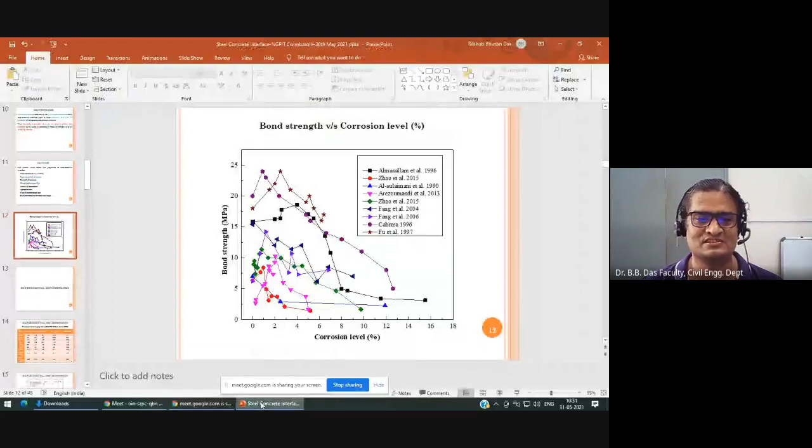Good morning. Shall we start, Shobna? Good morning. Good morning, ma'am, yes, we can start. Dr. Muthupriya, good morning, sir. Welcome. Shall we start, sir? Yes, you can start. Very good morning to one and all.

I hope you can see and I am proud and privileged to welcome all of you for this one week faculty development program on thrust areas of research in civil engineering, organized by the Department of Civil Engineering, Dr. NGP Institute of Technology, Coimbatore, in association with the Indian Concrete Institute, Coimbatore Center. I am happy to welcome our today's chief guest, B.B. Das, Professor of Civil Engineering, National Institute of Technology Karnataka, Surathkal, for this FDP.

Thank you for accepting our invitation, sir. Thank you, Dr. Muthupriya. I am happy to welcome all the participants who have joined through Google Meet, and also many who are unable to join as the meeting is full. So the YouTube link has been shared, you can watch it through YouTube.

I would like to thank our management, principal, and other authorities for permitting us to conduct this one week FDP on thrust areas of research in civil engineering. I am thankful to all the resource persons who accepted our invitation to deliver sessions on these thrust areas, and I thank all the participants for their interest in attending this faculty development program.

I also welcome the chief guest again and the participants for this one week faculty development program. I would like to invite the coordinator, Ms. Shobna, to deliver the address on the chief guest's profile. Thank you.

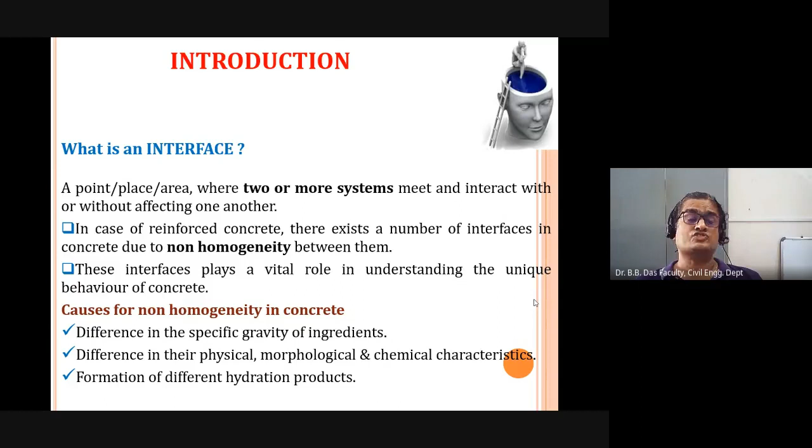That is the one giving me less pores in the concrete, so everything - but it is not the case. When I add water to the cement, I get different varieties of hydration products: calcium silicate hydrate, calcium hydroxide, the monosulfates, the ettringites. There are many such hydration products being formed depending on the type of ingredients and the source of materials. So that is also one of the prime reasons for the non-homogeneity in concrete. Remember, that is what you should understand.

So when I talk about the steel concrete interface, that is what we discussed about the non-homogeneity in concrete. But let us move into the steel concrete interface now. What is the non-homogeneity? Well, steel is very high in specific gravity, a very dense material, as compared to the specific gravity of concrete. That's the major reason. There is bound to happen a non-homogeneity, and due to that, there must be formation of an interfacial transition zone between them. That is natural - you cannot avoid it. It is an impossible job.

So when we talk about the steel concrete interface, that is SCI, it mainly consists of two parts: one is the steel part of the steel concrete interface, and another is the concrete part of the steel concrete interface. Now come to this picture. Here is my steel concrete interface - left side is my reinforcing steel, and right side is my concrete. This dotted line divides the steel part and the concrete part of the steel concrete interface. Now let us go one by one.

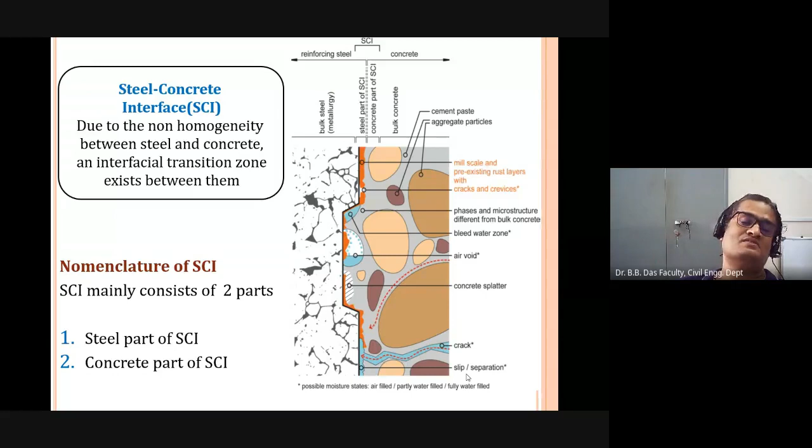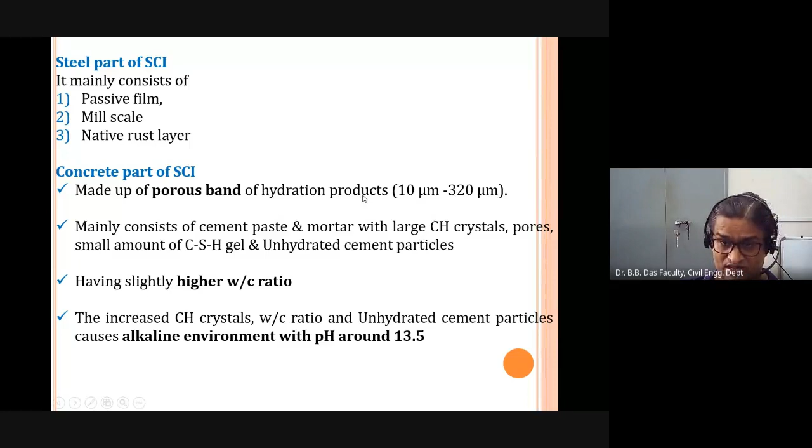So, as I talked about, the steel part of SCI mainly consists of passive film, mill scale, and native rust layer - all characteristics related to the steel's metallurgical properties. Now, the concrete part of SCI is made up of a porous band of hydration products, mainly consisting of cement paste, mortar with large calcium hydroxide crystals, pores, a small amount of CSH gel, and unhydrated cement particles, having a slightly higher water cement ratio. The increased CH crystals - calcium hydroxide - water cement ratio, and unhydrated cement particles cause an alkaline environment with pH around 13.5.

These are the information that we have collected from the literature, and we have also checked and verified it in our lab. Yes, whatever the reported literature says is absolutely okay - we are getting the same thing. So that is my concrete part of the steel concrete interface.

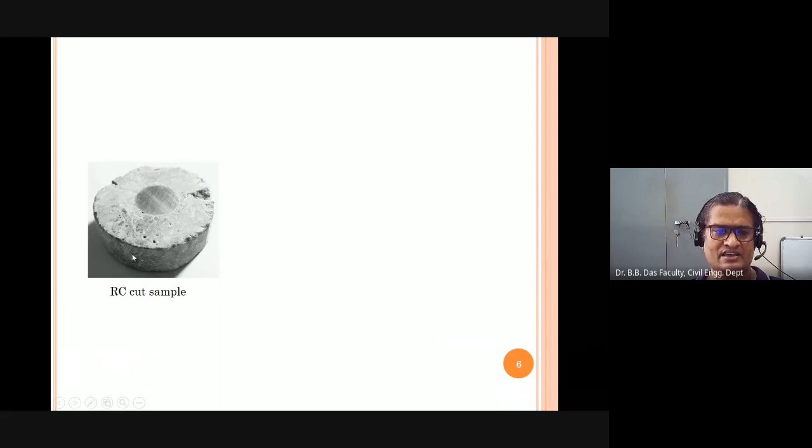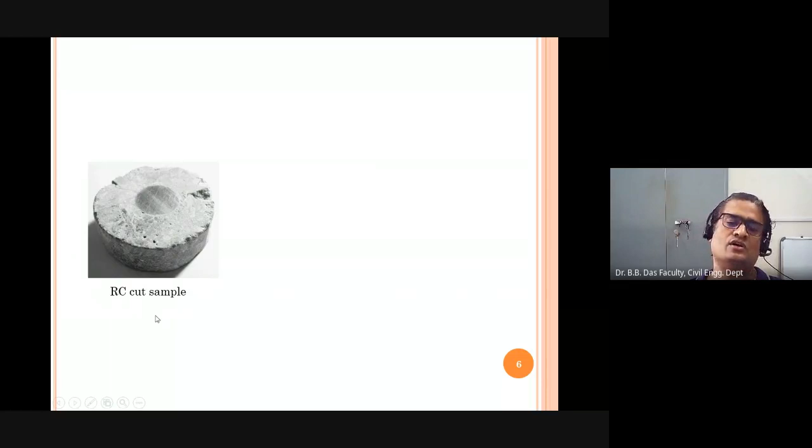So now you can see, you must have seen this kind of pictures. What is this kind of picture? Well, the complete dark area is steel, surrounded by reinforced concrete. So this is a core being taken from a concrete beam. This is called a reinforced concrete cut sample. You must have seen it actually.

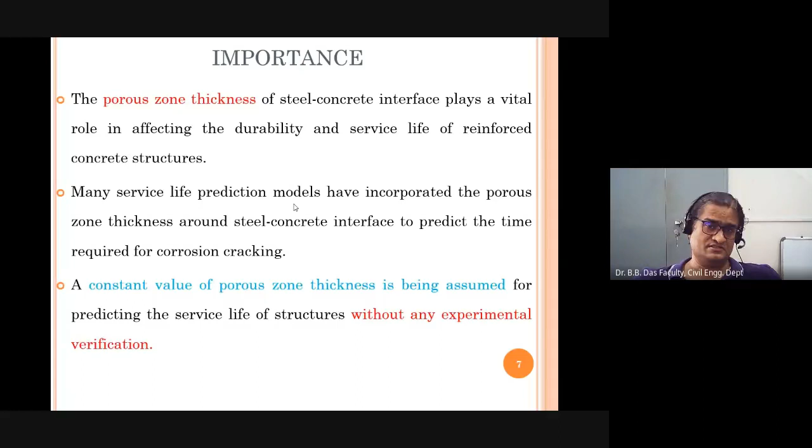Now, many service life prediction models, there are many models, if you go into literature, well, there are many such prediction models with the help of which you can determine the remaining service life for reinforced concrete. What we observed actually is that many service life prediction models have incorporated the porous zone thickness around the steel-concrete interface to predict the time required for corrosion cracking.

Remember, service life prediction models are nothing but the determination of when, because of corrosion, the concrete is going to crack. If you can determine at what time the concrete is going to crack, well, remember in an RCC reinforced concrete structure, if your concrete is cracked, that is the point where your service life is almost getting lost.

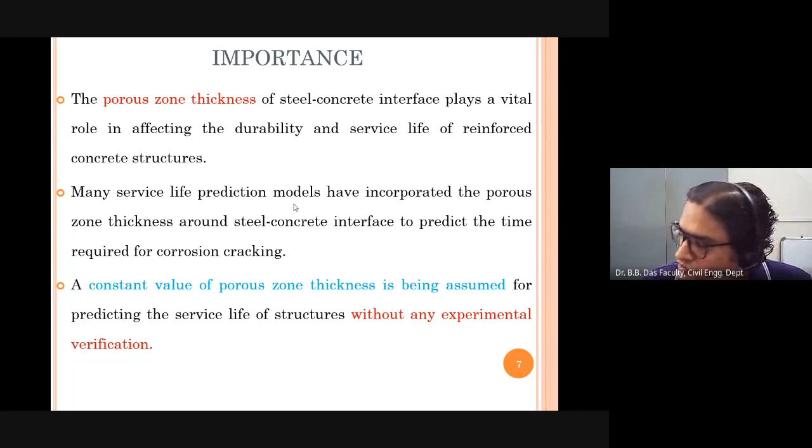Meaning, once the concrete is cracked, it is going to fall in a patch, and the reinforcement steel is going to be exposed, and corrosion will start, and that is the way you can say the bridge or the structure, the building, is at risk. That is the point where we need to evacuate people from buildings, or stop the movement of traffic on bridges. So whatever the case, you have to take measures. So that is actually my service life prediction models.

Now what is happening right now, till now what is happening actually, what was happening before our research.

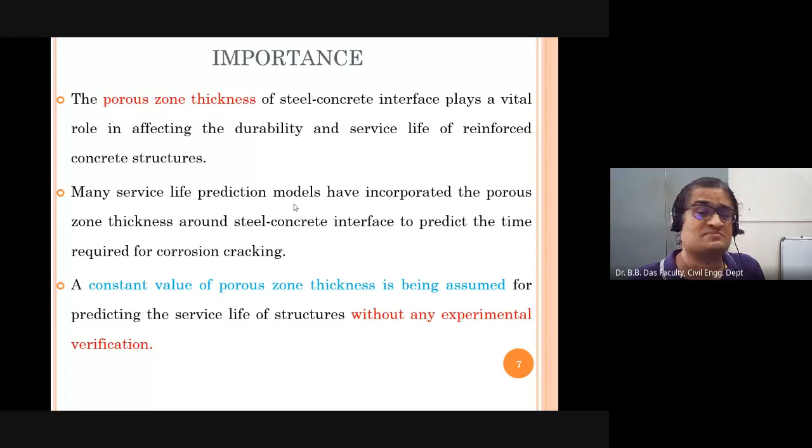A constant value of porous zone thickness is being assumed for predicting the service life of structures without any experimental verification. All the prediction models available, we checked everywhere, they are saying assume a constant value of porous zone thickness.

So imagine you have a concrete and steel. Now the sample I shown you, this is my sample. I will assume the ring - there is a ring of this kind of porous band. That is what I am calling my porous thickness, this thickness, let us assume it.

Well, in civil engineering design, many things we assume, isn't it? You must have assumed when you design for a beam, reinforced concrete beam. There are many assumptions in a design, and this is also how all the researchers have been assuming.

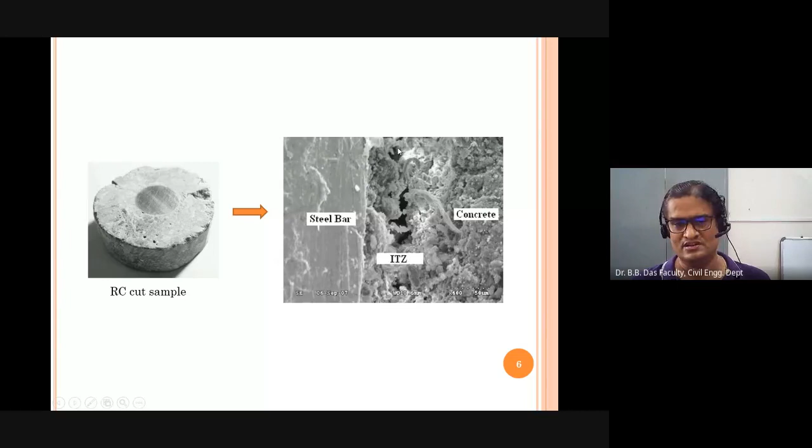They were assuming yes, there is a ring, there is a constant thickness ring available within the steel and concrete. But do you think, after seeing the picture, that the pores available everywhere have the same thickness? Everywhere, are you finding the same thickness? No, it is not the case actually. It is not the case.

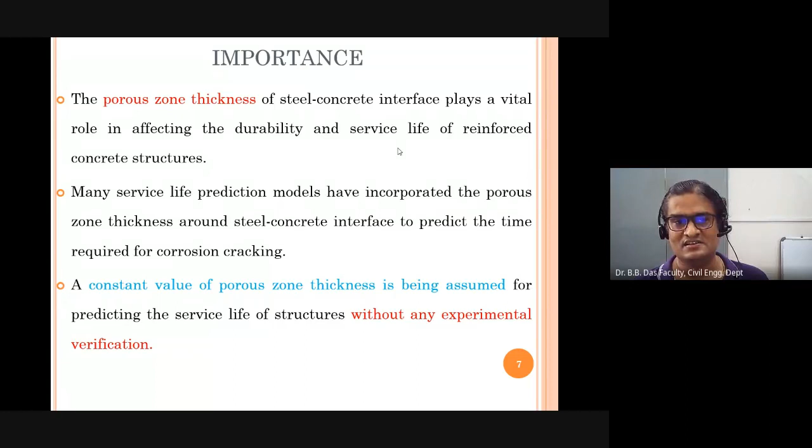So that is found to be a big flaw in the service life prediction models. That is the way we thought we will work on determining what is happening when we go with measurement of the porous zone thickness.

Now come to this, okay, service life model. I was just talking about when the concrete is going to crack. Now let us assume the x-axis represents the functional service life of the structure, and the y-axis represents the pressure caused by the corrosion.

When I talk about the beginning of the functional service life, how does it happen actually, what is the mechanism? The moment you build the reinforced concrete structure, the first thing is it is going to have an exposure against harmful ions such as carbon dioxide or chloride. Let us assume for some time, the initiation period, the penetration of carbon dioxide and chloride is going to take place, or you can say the movement of moisture may take place.

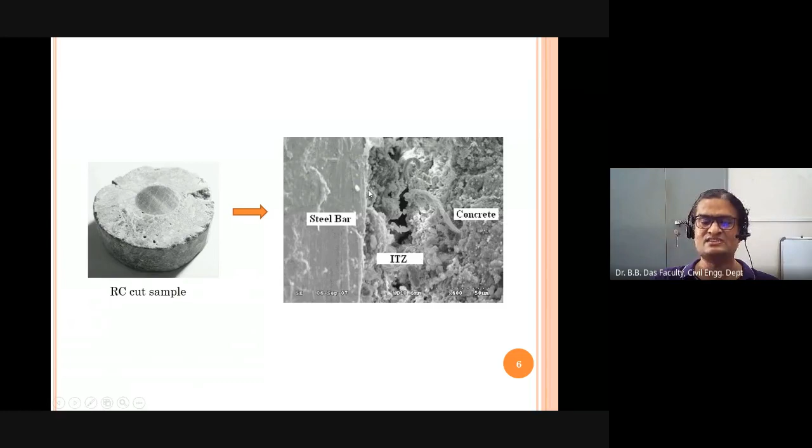Remember, rust has a very low specific gravity. The steel has a density of 7.85, but the rust has a density of one-third that of the steel. So what will it do? It needs more space to occupy, so it will occupy more space.

Where will it happen? Well, in the initial stage it will keep on filling these pores. So that is showing the expansion time, or the free expansion time. So I will call this my expansion time, the free stage. This means till now not much stress is being pushed to the concrete from the steel.

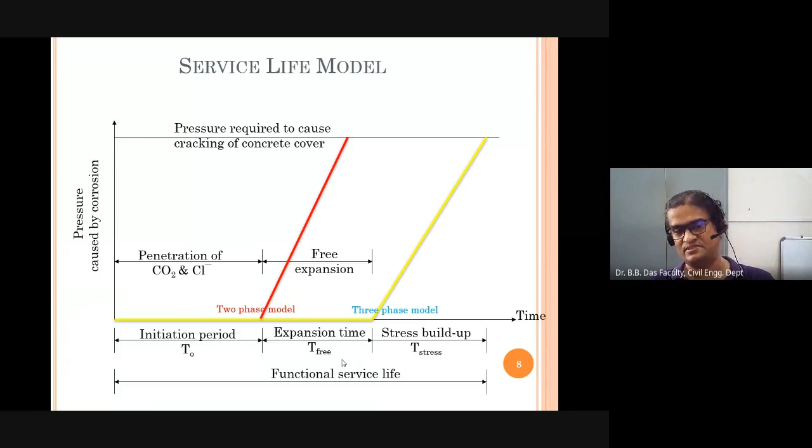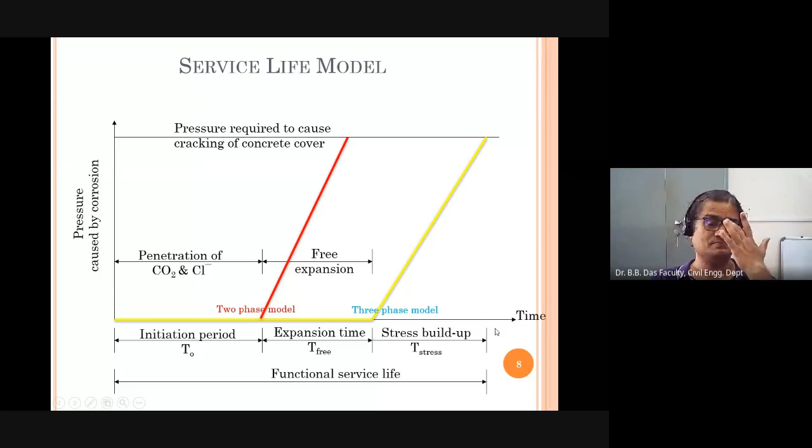The last stage is my stress buildup. Stress buildup is basically the moment all the space between the steel and concrete gets filled up. Now, as corrosion keeps on happening, you get more and more rust. But where? There is no space left to occupy, because all the space between steel and concrete is being filled up. So that is the point where stress is going to build up within the concrete.

So the steel is going to push radially into the concrete to go out, because it needs more space. I am getting corroded, and my rust products need more space. That's why it is called the stress buildup, stress buildup within the concrete.

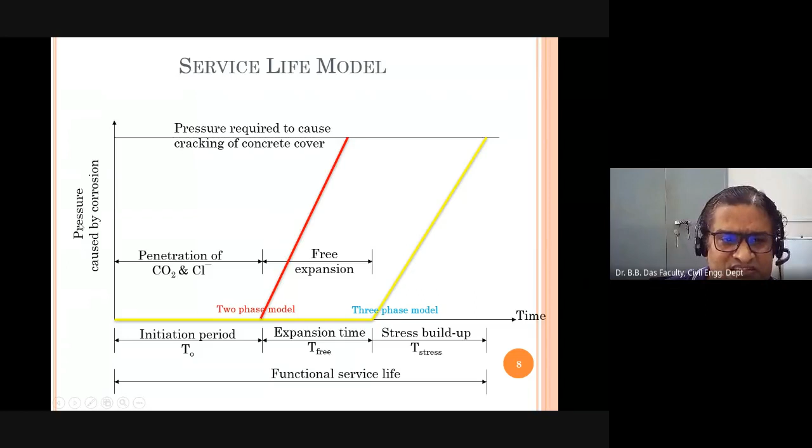Remember, now what will happen? The stress will keep building up. At this point, that is the pressure caused by corrosion. This is the point where the tensile strength of concrete becomes less than the pressure caused by the corrosion, and that is the point where the concrete is going to crack, because the concrete is being pushed radially by the steel. It develops a stress, and if that stress overcomes the tensile strength of the concrete, that is the point where I'm going to get a crack on the concrete surface.

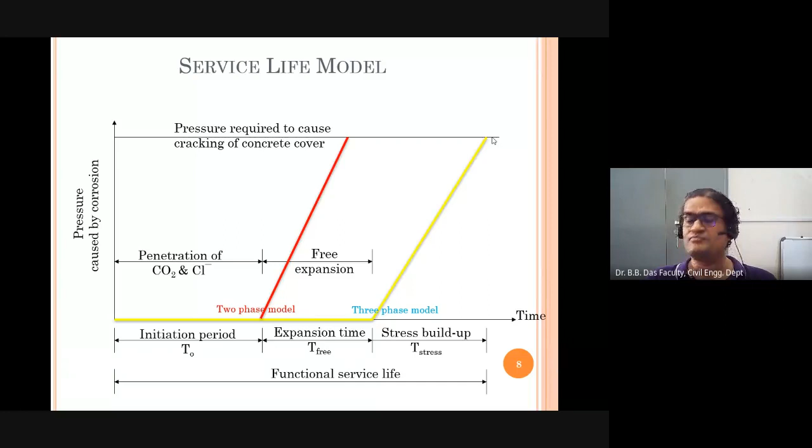So that is the point I will call the pressure required to cause cracking of the concrete cover. Okay, so there is a pictorial representation, we will go into it.

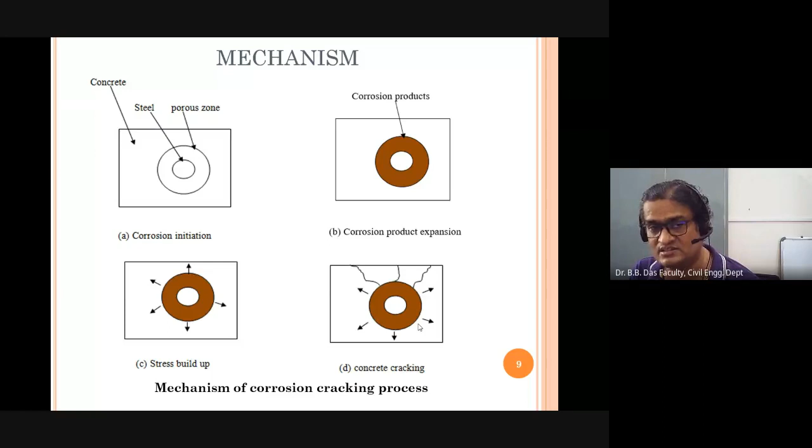I have experienced many such problems in bridges. So many times you will suddenly see a patch of concrete going to fall from the bridge while a vehicle is passing, and imagine a patch of concrete falling on your vehicle while you are traveling around 120 kilometers per hour. What is going to happen? So this is a serious concern in cold countries like the United States and other cold countries.

So definitely there was an important research gap not being addressed at that time. So what is the significance? A small variation in considering the porous zone thickness around the steel-concrete interface leads to huge variation in service life prediction of concrete structures in marine environment.

I will tell you, you will get to know. Don't think about what is the thickness of the porous zone - remember, this is just at the micron level. So the size of the porous zone is only in micrometers, that is 10 to the power minus 6 meters.

So even though it is in micrometers, if your assumption is slightly deviating, or if there is a small variation in the micrometer range, you will get a completely different result, a complete variation in the service life or remaining service life for the structure. So imagine how dangerous it is.

This is the point I experienced when I came back to India and applied these models in many of the bridges in Mumbai city, because Bombay is just on the coast with a highly corrosive environment.

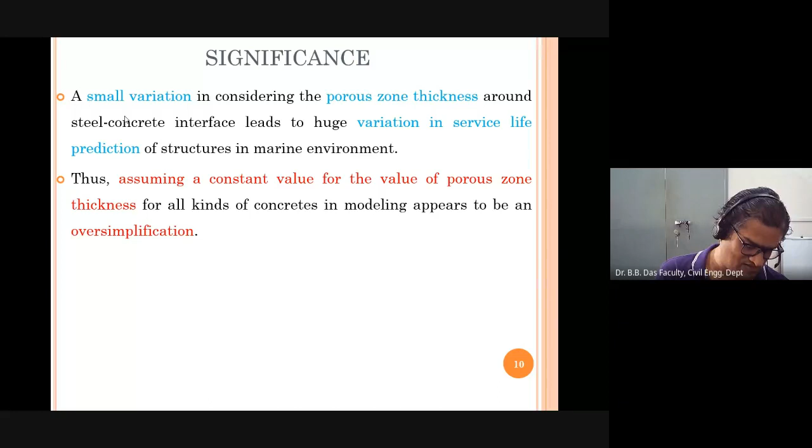That is the problem. So the challenge is thus: assuming a constant value for the porous zone thickness for all kinds of concrete in modeling appears to be an oversimplification.

This is the point where I realized, introducing different cements - we have in the market ordinary Portland cement, Portland pozzolana cement, Portland slag cement. Right now we have three types of cements available in the market. Plentifully available is the PPC, that is Portland pozzolana cement, followed by the PSC, Portland slag cement.

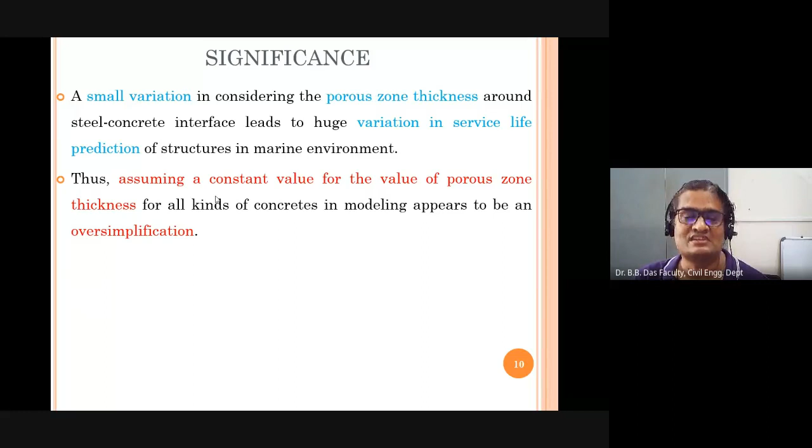So when we are using different kinds of ingredients or different kinds of cements, shall we use the same value for all the models, for all types of concrete? That was also a big question mark. So it is an oversimplification - let us not be overconfident. Let us measure and see what is happening when I am going with the different types of cements.

If you go into the different literatures, a lot of work has been done on this. People have talked about the different factors affecting the steel concrete interface properties, such as water cement ratio, type and quality of cement, strength of concrete, mineral admixtures, amount of compaction, aggregate size, type of reinforcement bar, diameter and shape. So there are many such factors affecting the properties of the steel concrete interface.

I remember one of my scholars went to a conference, TMSF 2019, and was delivering a review work on this slide, about how different factors influence the properties of the steel concrete interface. Some of you might have heard about it.

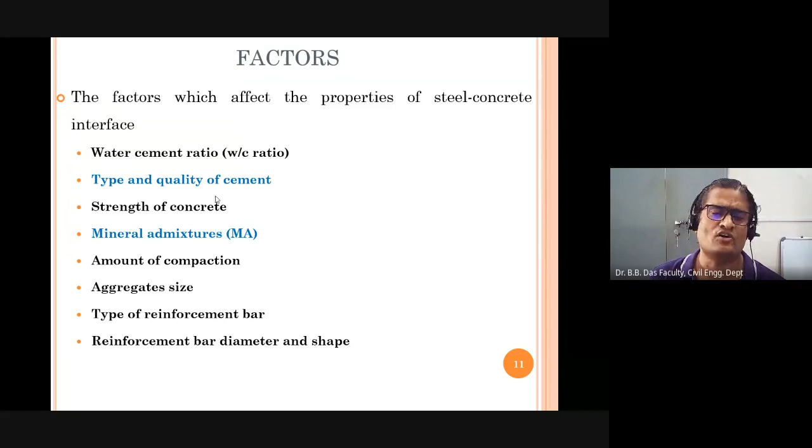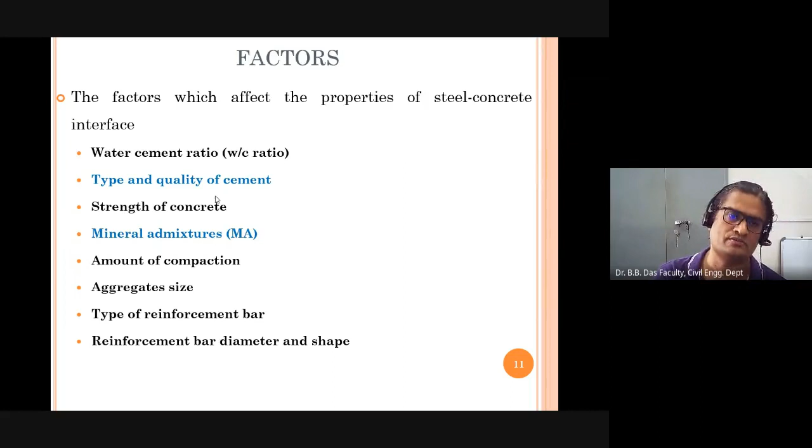So in today's presentation, I will talk about the type and quality of cement, or you can say the mineral admixtures, when I talk about fly ash and silica fume. So we will talk about cements. Well, one more thing I want to show you, this picture.

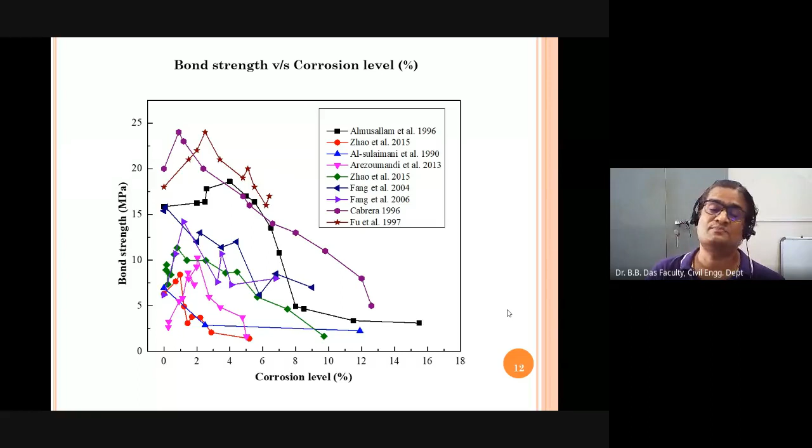You can see here, for one researcher, at 1 or 2% corrosion the bond strength increases from about 20 to almost 25, but as the corrosion percentage increases, it drastically comes down. By around 10-12% corrosion, the bond strength becomes very low. So that proves the mechanism of the corrosion cracking process.

So let us move into the experimental methodology. This is a very important theme of the research. If you have any doubt, please ask me, and I will explain again.

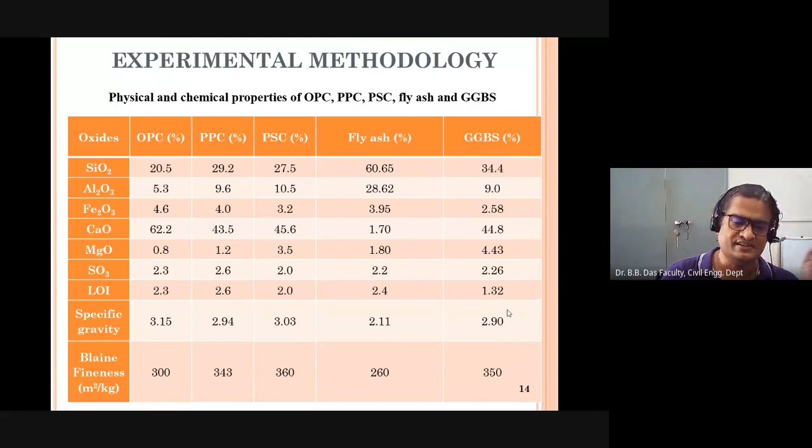So what we did: we collected materials like OPC, PPC, PSC, fly ash, GGBS, all from the market, and determined their oxide compositions, specific gravity, and fineness, all of which are available. This also includes the particle size distribution analysis for coarse aggregate, fine aggregate, fly ash, and GGBS.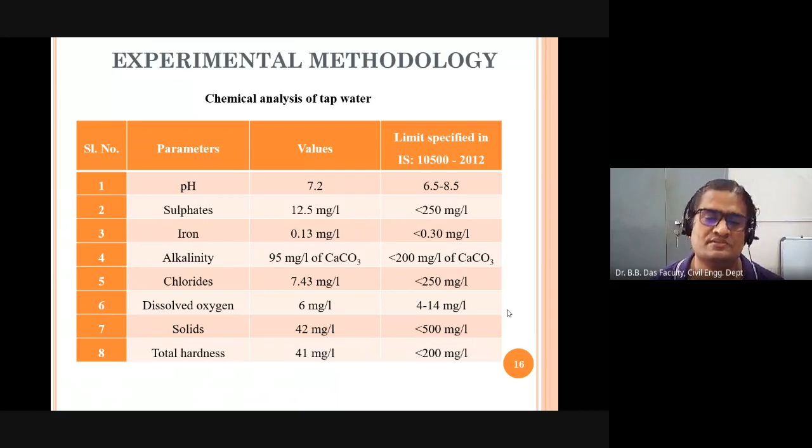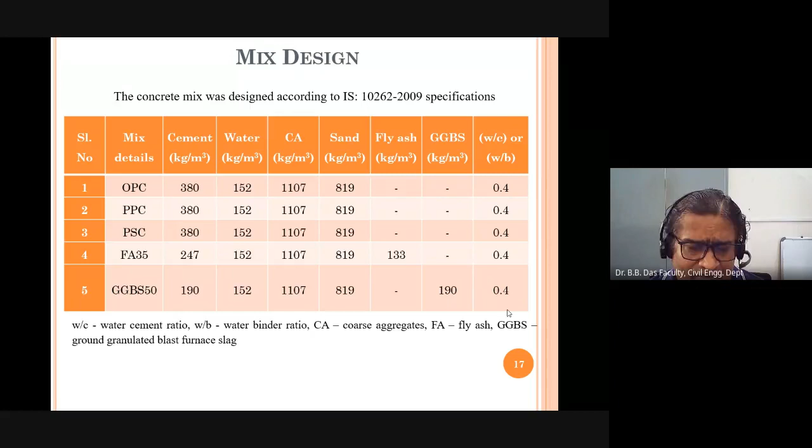Then we did a chemical analysis of the tap water too, checking it should not have any chlorides or sulfates since we were using tap water, ensuring it is within IS limits. And this is the simple mix design, done for M40 grade concrete, where we kept the cement content fixed at 380 kg per meter cube, then replaced it partly with fly ash and GGBS.

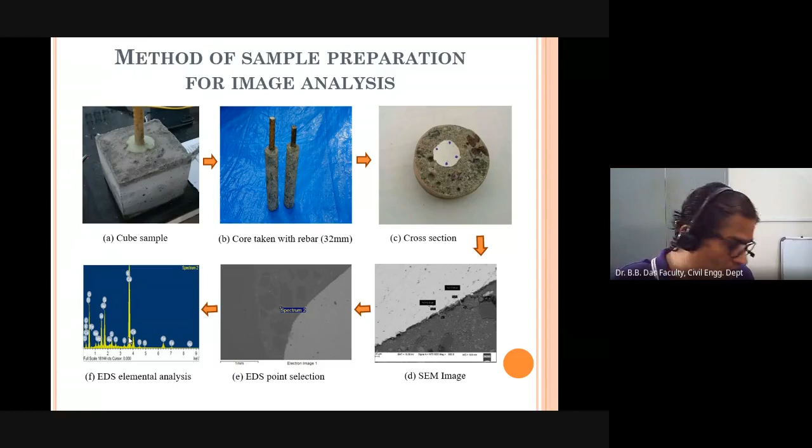I will show you, this is my final energy dispersive spectroscopy elemental analysis, which will give me a mapping of calcium to silica ratio. For a cementitious material, the most prominent ratio of elements is the calcium by silica ratio, you must be knowing about it. Last lecture also I spoke about how calcium by silica ratio plays a vital role in understanding the hydration mechanism.

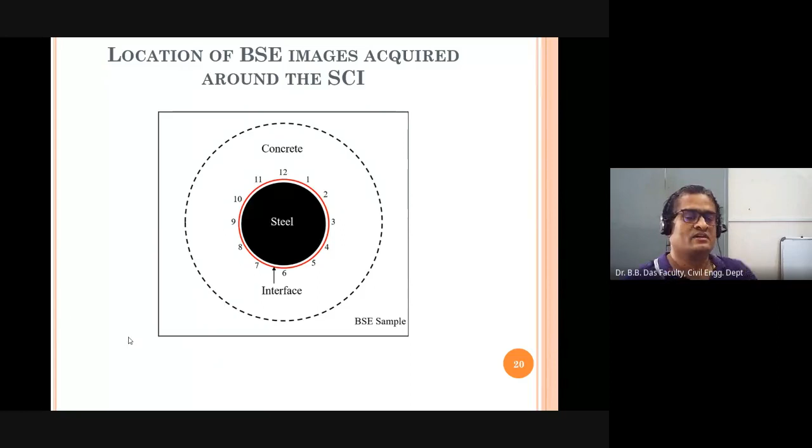So you can see here, for backscattered electron images in SEM, we have taken around 12 images all across the steel concrete interface. So this is my steel and this is my concrete. I have taken images at frequent, uniform intervals—1, 2, 3, 4, 5, 6, 7, 8, 9, 10—12 points I've chosen for taking the backscattered electron images.

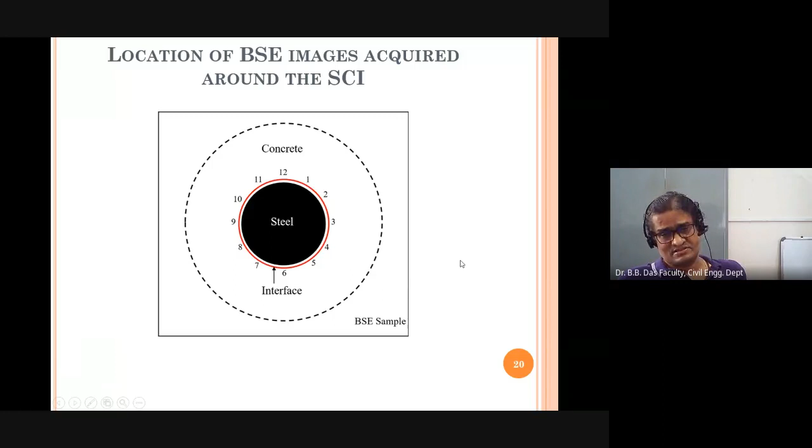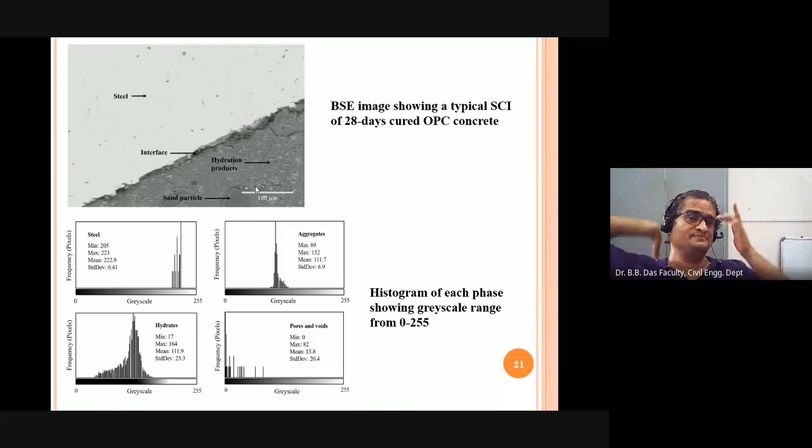So now what is important for me? The important thing is we have to go with the grayscale analysis. Grayscale analysis is an image processing analysis which can determine the pore quantification, the quantification of pores.

So when I do the grayscale analysis for steel, I am getting a mean value of 222.9. For pure aggregates, the grayscale analysis mean is giving around 111.7. When I go with the hydrates, the mean I'm getting is 111.9. Now when I go with the pores and voids grayscale analysis, I'm getting a mean of 13.8. So that is the idea this picture gives me.

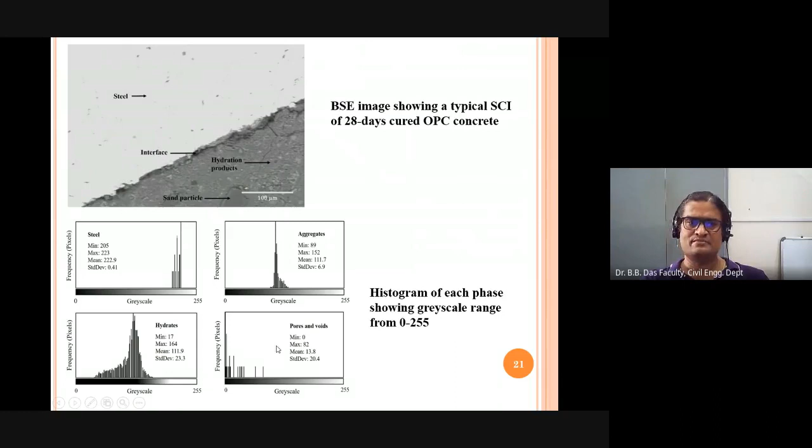So this is my interface. Now, in this picture, can I separate the pores and voids from other materials? Well, exactly—what I did was, we did some programming, some image analysis programming, and through that we did some BSE, that is backscattered electron image, thresholding.

So we realized, with a gray value of 42 and below—because the highest for the pore was 82—so we considered around 40 as the threshold. Below 42 is my pores, more than 42 is my other materials, that is maybe steel, maybe concrete, maybe the aggregates or other materials or hydration products.

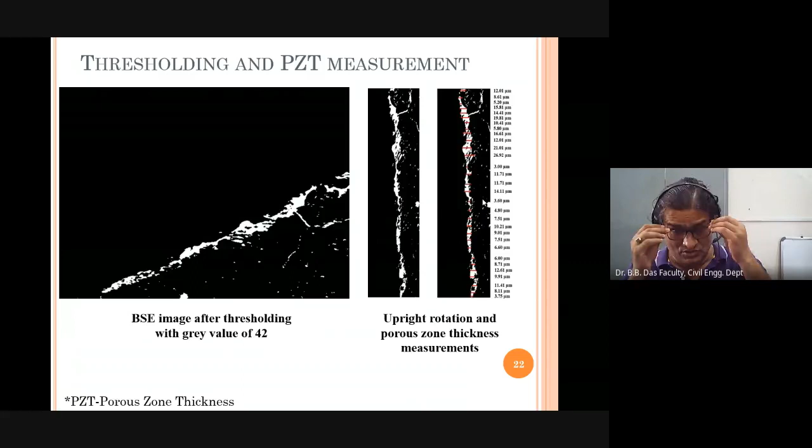So now how are we going to present it? Statistically speaking, if you see the statistics, statistics says you have to measure a minimum of 30 points. Your measurement has to be there, and you have to take the average of all the measurements. Then you can report for that particular sample: yes, this is my average porous zone thickness.

So that is the way. The porous zone thickness measurement is over, and then we will see next the results. Now, again, the point is the energy dispersive spectroscopy locations around the steel concrete interface.

Now how are you going to do it? That is also important, because EDS is going to define the hydration phenomena. So what we did - you can see here, the red one, assume it is just on the steel concrete interface - and from the steel I know there is no point in going towards steel, because steel we know is very much uniform. So from steel we have gone a 20 micrometer distance.

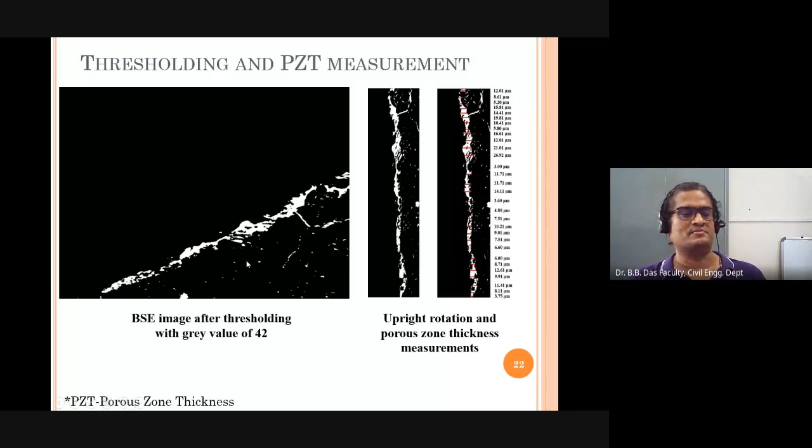So from this point 20 micrometer, this point 20 micrometer, this point 20 micrometer, to check what is happening in the hydration mechanisms. This picture shows it: somewhere one point is on the ITZ, and then 20 micrometer, again 20 micrometer, again 20 micrometer, because we know this concrete is only non-uniform or non-homogeneous.

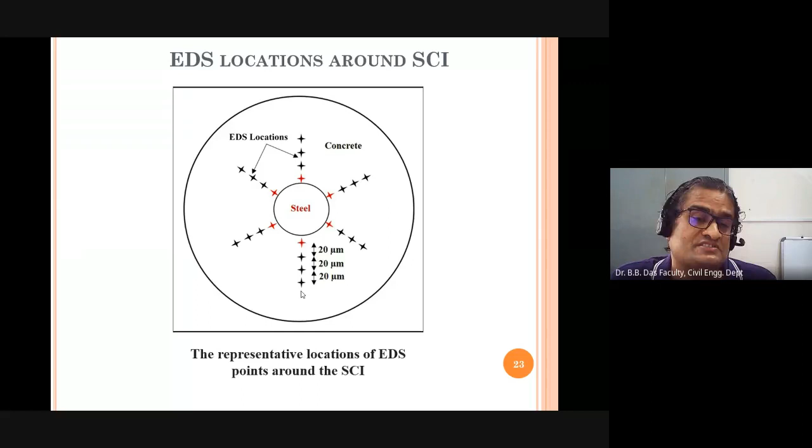So there is a need to check what is happening from the ITZ towards concrete, because steel we know is very much uniform - we don't need to understand that, a civil engineer doesn't need to measure anything there. It's a metallurgical point of view where something can be done, but from a civil engineer's point of view, nothing can be done, so better to measure this side. That is how we measured from steel at 20 micrometer distances - that is the point where the energy dispersive spectroscopic points were decided.

So here you can see exactly - this is my steel. The first spectrum for the concrete is taken just on the ITZ, that is the interfacial transition zone, and this is spectrum one for the SCI. Spectrum one is at 0 micrometer, that's what I was talking about, and spectrum 2 is 20 micrometer away from the steel surface.

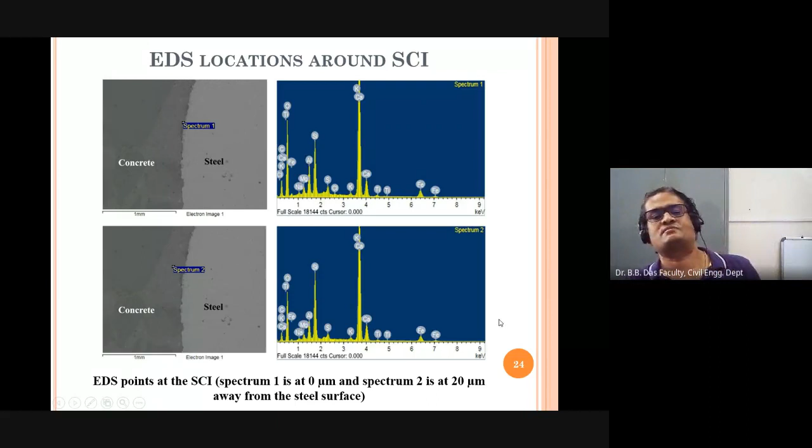So just as I was telling you, it is taken at 20 micrometer intervals. So spectrum 2 is 20 micrometer from the steel concrete interface, and this is my spectrum 2. Now let us go into the results and discussions.

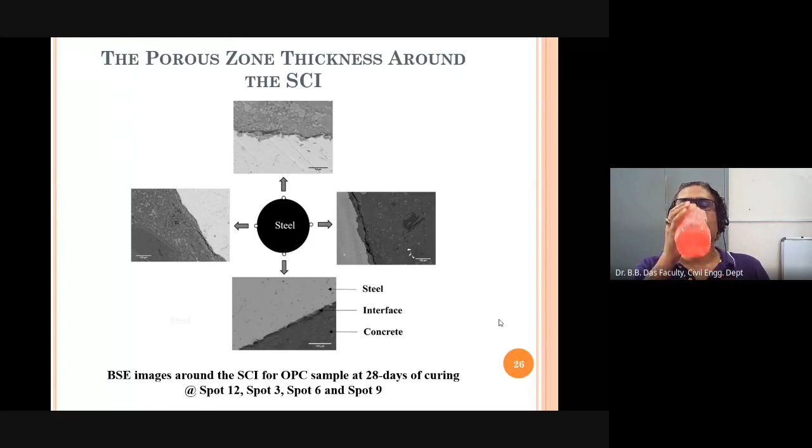So backscattered electron images around the steel interface for OPC sample, 28 days of curing. Spot 12, spot 3, 6, and 9 means these are my 12 spots. You must have remembered I counted 1, 2, 3, 4, 5, 6, 7, 8, 9, 10, 11, 12 like that. So 12. This is my 3, this is my 6, and this is my 9.

So exactly at the 4, okay, 90 locations, how it looks like. This is my steel, this is my interface, this is my concrete. This is just for your understanding.

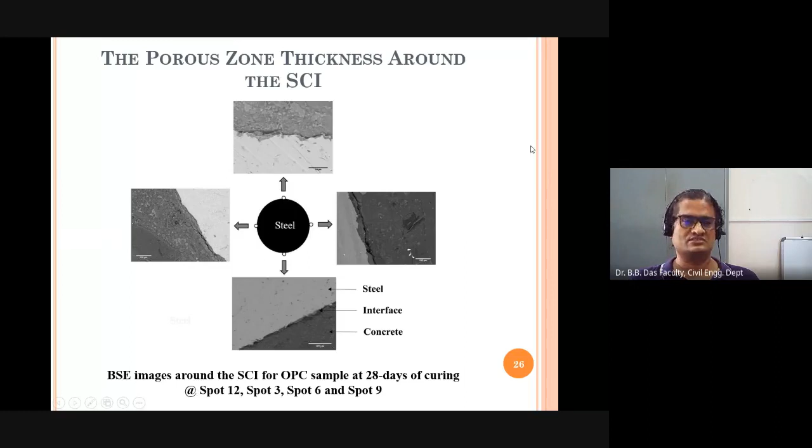So this is the way, okay, actually at 12 spots this job is being done. 12 spots, but for the presentation purpose, for clarity, I'm only showing the 4 spots. So this is the spot 12, 3, 6, and 9. You can see how there is variation in the

porous zone thickness. So this is the measurements of spot 1. So spot 1, okay, well, spot 1 we didn't do, so let us go to 12. So the image is spot 12.

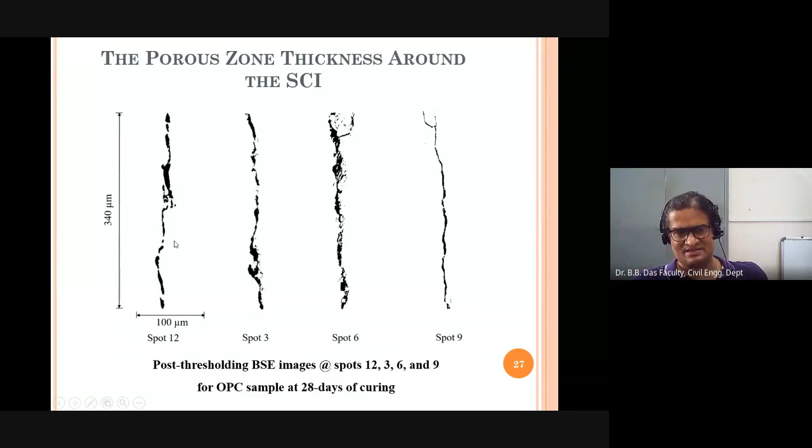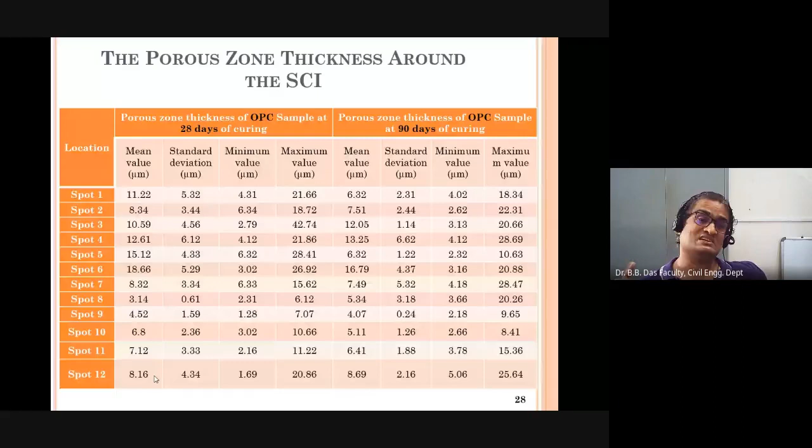Remember, as I told you, this is the first image, and then we measured here 30 times, and whatever is presented here is the average. So 8.16 is the average of 30 measurements. Remember, average of 30 measurements. So like that, all these are 30 measurements, like mean value, standard deviation, minimum, maximum.

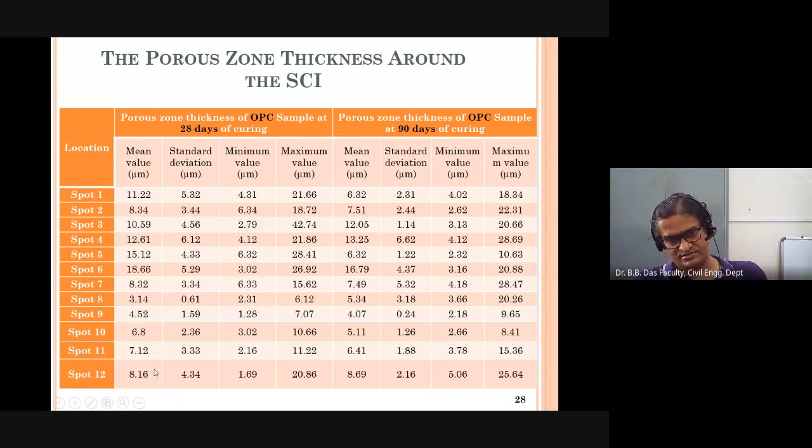So now we have to consider the mean values. This is my 28 days, and this is my 90 days. Similarly, this is for the PPC sample, 28 days and 90 days. Same case, same mean values. And this is my PSC, Portland Slag Cement, 28 days and 90 days. Okay, so what is the one?

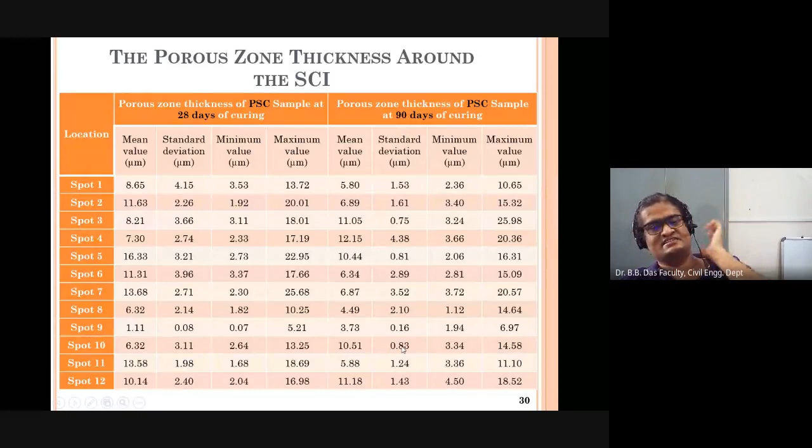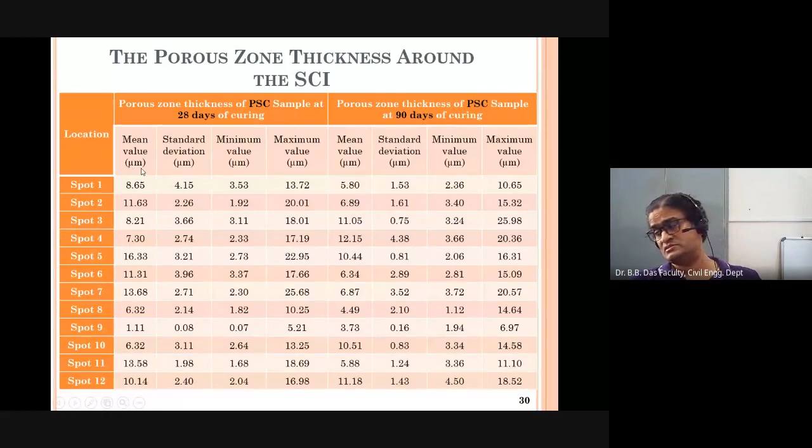Now what I showed you in the beginning was very much circular in shape, but after we did all this exercise, after we measured literally, remember this is in micron meter. Remember this. This is not in millimeter, not in centimeter. This is in micron meter. Remember this. Okay, so how much it is small actually, so how much sensitive.

Now what you are seeing here, first of all, remember one thing: the porous zone thickness is not uniform across the steel and concrete interface. So the thickness, whatever we were assuming as a uniform layer, it is not the case. So whatever models till now developed for service life prediction, by just assuming a porous zone thickness uniform in nature, are completely invalid.

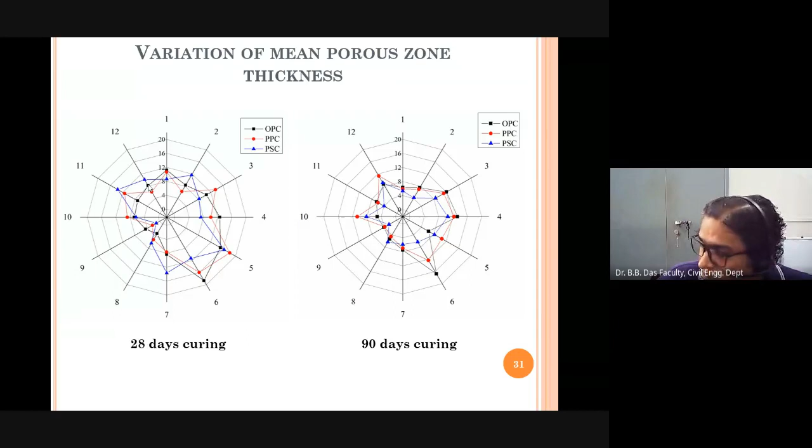They are not at all valid, because in one place you can see it is almost going to 20 micron. You can see 18 micron meter for OPC. In another case, it is around 6 micron meter, 4 micron meter. So how am I going to consider it as a uniform thickness?

So whatever the assumption is being done, those who are working on the mathematical modelings, developing the mathematical models in service life prediction, they have to rethink again now. They have to really rethink again for updating their models, because the porous zone thickness cannot be uniform, because in this part of the concrete, or this part of the steel and concrete, if you see, the permeability will be much more as compared to the other part, isn't it?

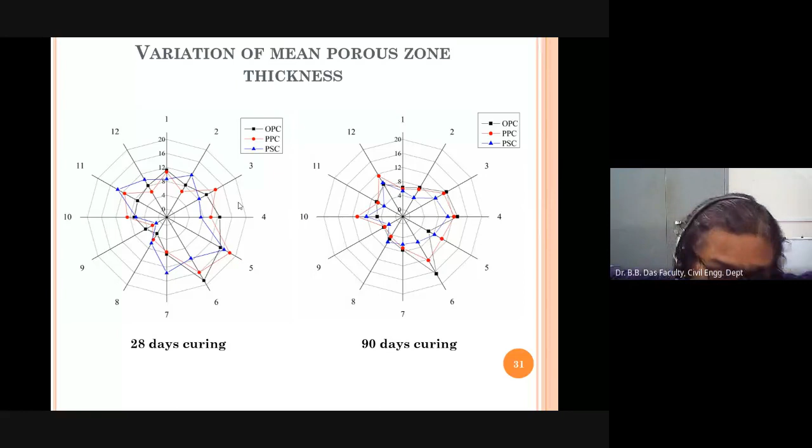So that is what is going to define the service life. That permeability property is going to define my service life. So if it is not uniform, remember there are some other forms of corrosion also that may take place, which normally is called pitting corrosion. That is going to be extremely detrimental. Okay, that is one thing.

Second thing is, now my title of the topic is I am just interested in OPC, PPC and PSC. Means I am taking three types of cements. Now see the 28 days. Okay.

Will these three types give a single value of corrosion? Not the case, not the case actually. So they are having different corrosion thicknesses.

In 28 days, if you see here, the PSC, Portland slag cement, which is in the blue color, is found to be lower, mostly found to be lower values as compared to the OPC and PPC.

Now come to the 90 days. With more prominent curing, the space between the steel and concrete is reducing. That we can experience here, and still the PSC band is much lower than the OPC and PPC. So PSC is having more stability if you really do a good curing.

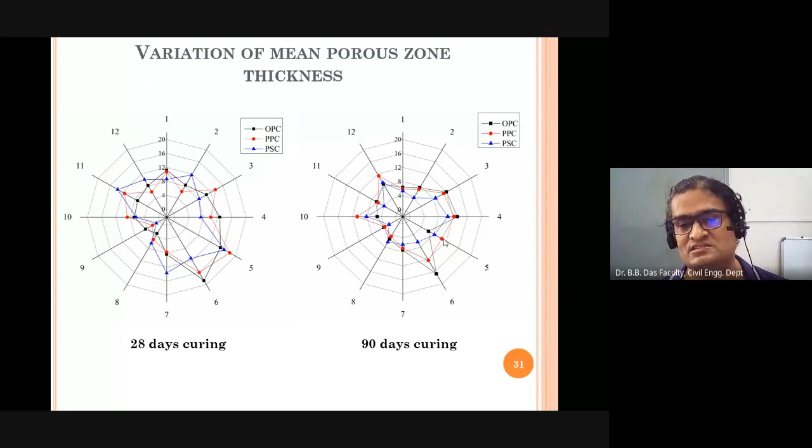So curing is very important in concrete science. Without curing, concrete is just zero. So curing is very much adequate. Even though this dimension is of micrometer size, curing has a decisive influence on the properties in the micrometer size. Imagine how it is influencing in the meter scale structures. That's why curing is very important when you talk about quality control practices.

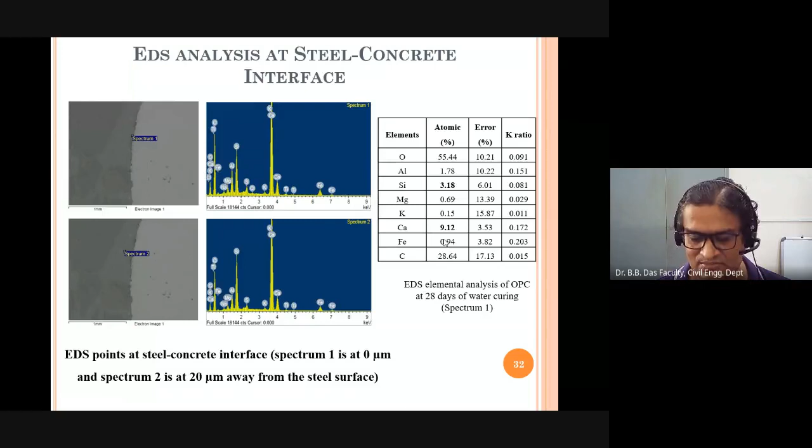Then the EDS analysis. We have done it in a similar way, at 12, 3, 6, and 9 o'clock positions, but we have done it at the interface and at 20 micrometers away from the interface. So these are the EDS analysis values.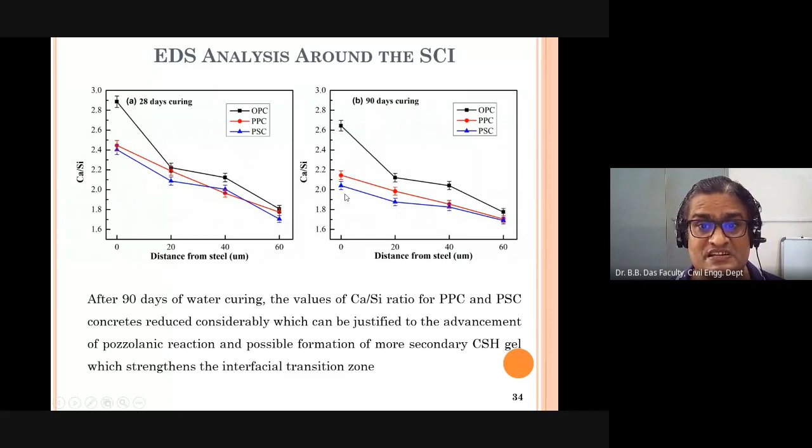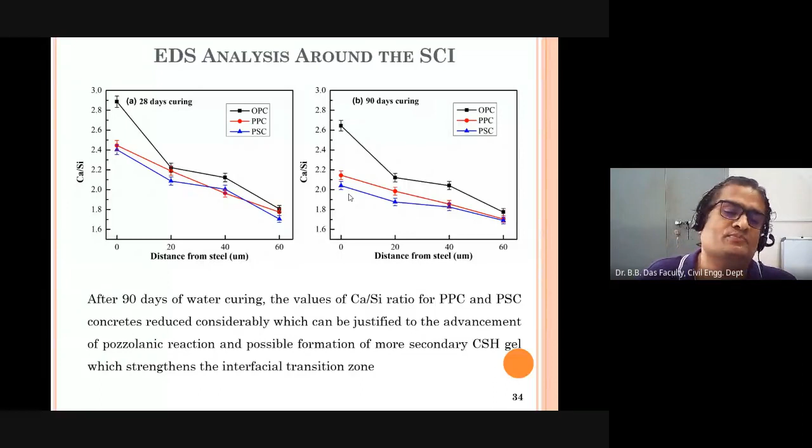Now PSC has a much lower Ca by Si ratio, meaning the formation of more calcium silicate hydrate gel for Portland slag cement as compared to PPC and OPC. OPC is much less as compared to PPC and PSC, but PSC is still better than PPC. That is what researchers are talking about and recommending PSC in most of the important constructions.

So this is what we learned from this topic.

Whatever the bond strength, I've talked about the same specimen. We just did the bond test, meaning we pulled the steel from the concrete. Here is the Ca by Si ratio versus the ultimate bond, shown for 28 days and for 90 days. It's natural that at 90 days, the calcium silica ratio gets lesser, which indirectly indicates the ultimate bond strength is also higher. There is a uniform trend at 90 days, but not at 28 days. So that shows the relationship between ultimate bond strength and calcium by silica ratio.

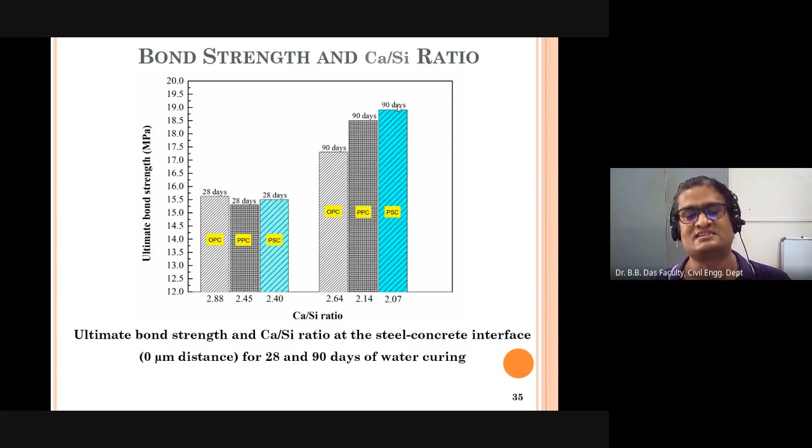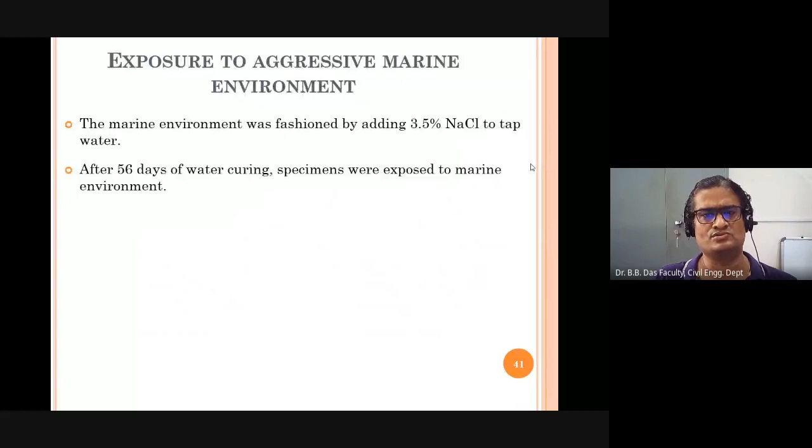These are the things I will not talk about much. We did some additional analysis, but I will cover that in some other lectures. So now let's go directly into the conclusions.

The preferential formation of calcium hydroxide was confirmed through scanning electron microscope images and energy dispersive analysis at the steel concrete interface. I was telling you that at the steel interface, my Ca by Si ratio is higher, and when you go away from the steel concrete interface, that indicates the formation of calcium hydroxide rather than calcium silicate hydrate.

Second, the gradual reduction in Ca by Si ratio signifies the gradual reduction in calcium hydroxide from the steel surface toward the bulk concrete as the curing period increased. Curing period is key - remember, I'm telling you again and again, curing plays a decisive role. Even this measurement was only at a micro level, but it has a decisive influence.

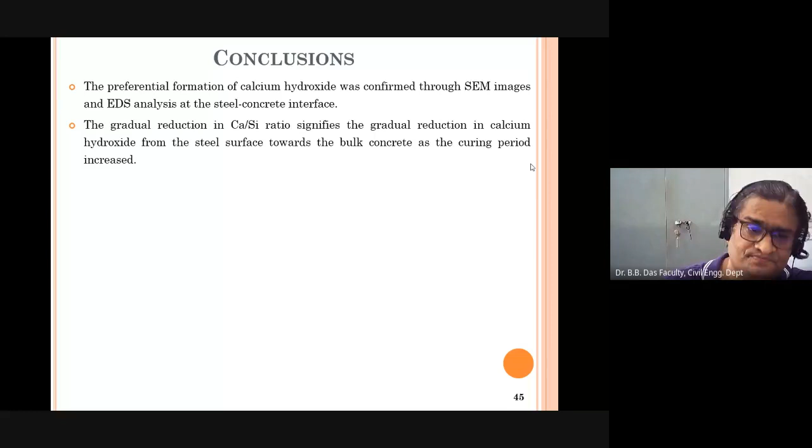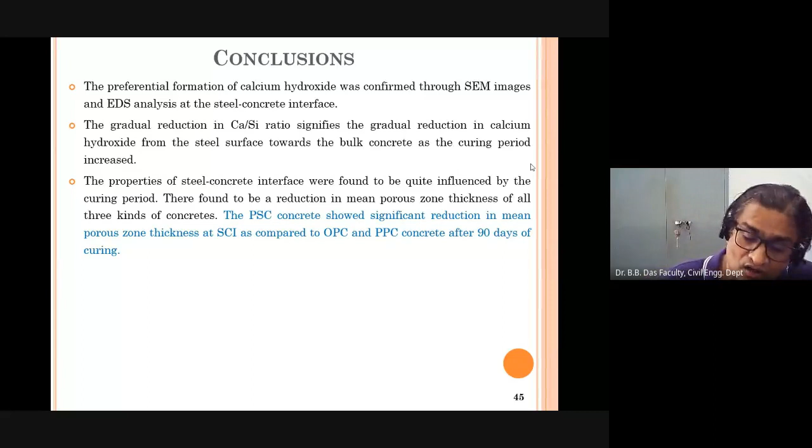The properties of the steel interface were found to be quite influenced by the curing period. There was a reduction in mean porous zone thickness for all three kinds of concrete from 28 days to 90 days. The PSC concrete showed significant reduction in mean porous zone thickness at the steel concrete interface as compared to OPC and PPC concrete at 90 days of curing. So Portland slag cement shows better performance compared to both other types of cement. The reduction in mean porous zone thickness may be considered one of the many influencing factors that resulted in increased ultimate bond strength.

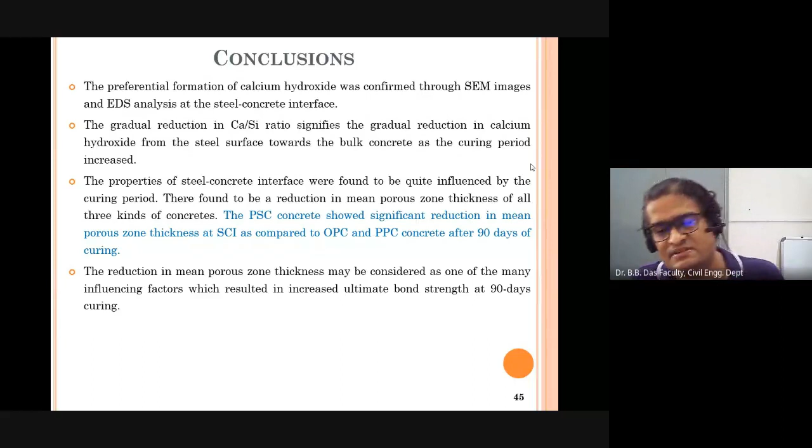I showed you the picture - when my ultimate bond strength is increasing, that is natural, because the porous zone thickness is being reduced.

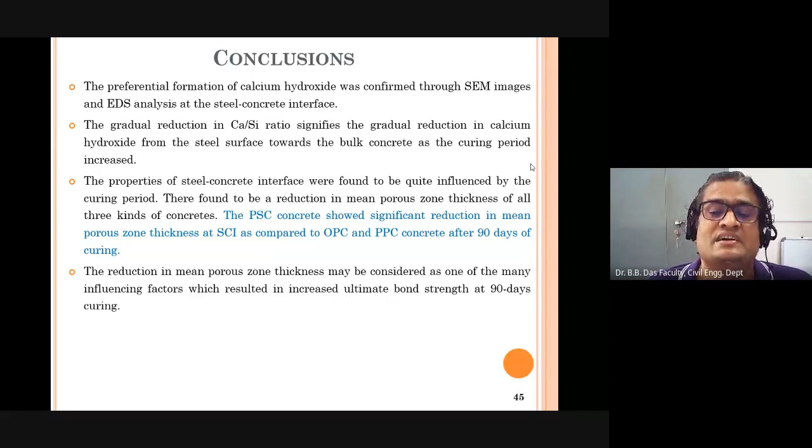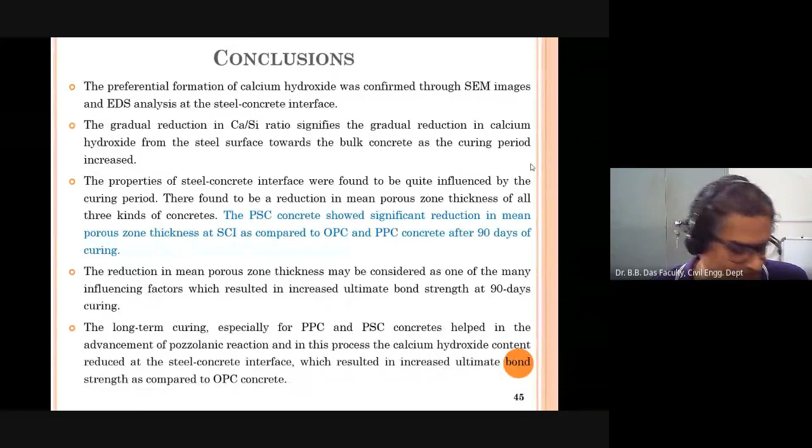Long-term curing, especially for PPC and PSC concrete, helps in the advancement of the pozzolanic reaction, and in this process, the calcium hydroxide content reduces at the steel concrete interface, which resulted in increased ultimate bond strength as compared to OPC concrete. We know this well - more curing period, or long-term curing for PPC and PSC, since both cements have a secondary cementitious material, helps in the advancement of pozzolanic reaction. That is key.

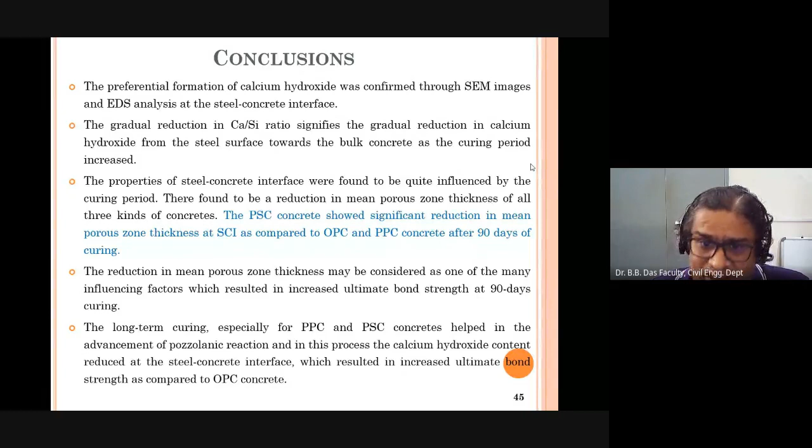When you go for a pozzolanic based material in concrete, remember you have to go for a little more curing period - that is essential, that's also what we came to know. That is going to reduce the calcium hydroxide content, and that is what helps in getting more ultimate bond strength as compared to OPC concrete.

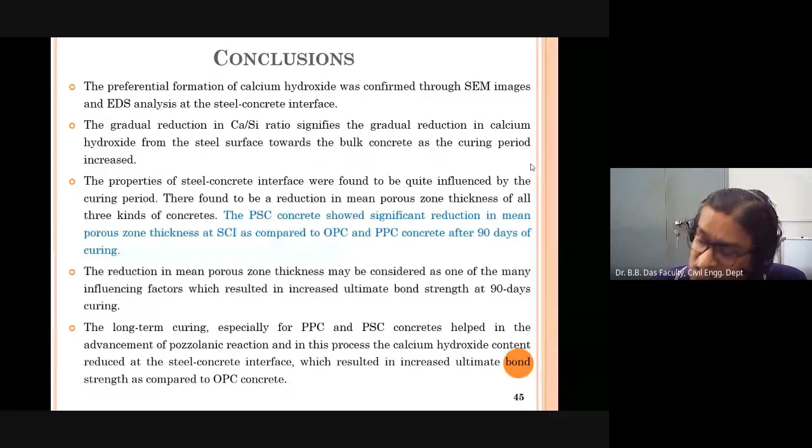If I'm getting higher ultimate bond strength, what is the advantage for me? The advantage is the service life of the structure is going to be more, because the bond between steel and concrete is much better, and that gives me a better service life.

If you want more detail on this presentation, you can go into some publications my student has done - one on the influence of sample preparation techniques on microstructure and nanomechanical properties of the interface, a very recent publication in Construction and Building Materials. What I presented here is from the second paper, microstructural study of steel concrete interface and its influence on bond strength of reinforced concrete, published in ASTM International. We have done a lot of other review work too, which you can find published on my website for the Sustainable Construction and Building Materials Laboratory.

So you can go through my publications, and if you have any kind of doubts, you can write to me at any point of time.

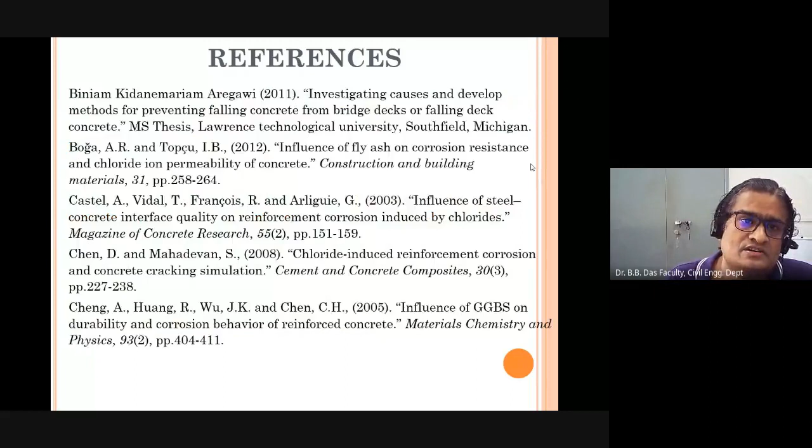These are some of the references for understanding the microstructure of the steel concrete interface. Then we did our work.

At this point of time, I will ask if you are having any kind of doubts. We have some time, and I can take a few questions.

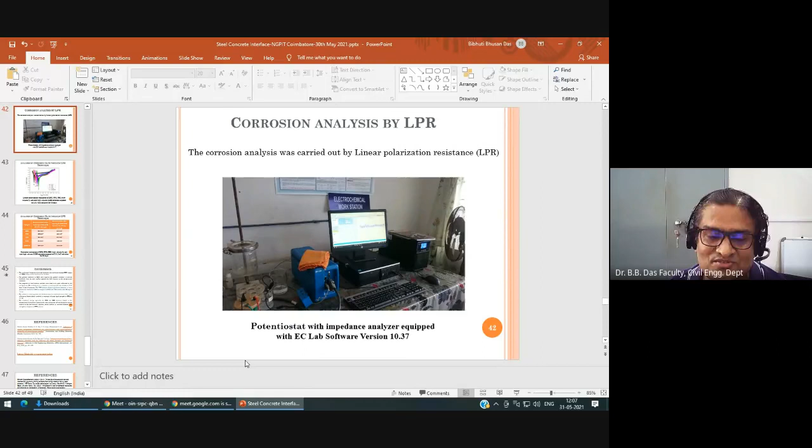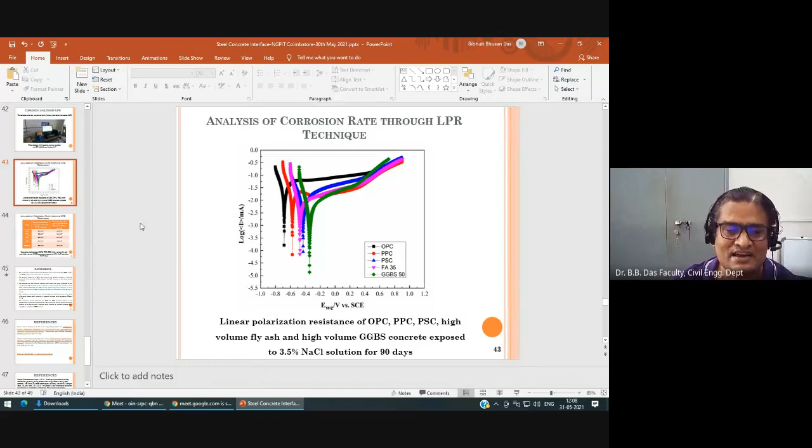But there is also one more method through impedance analysis. Through this, we can measure the corrosion potential. Any other question?

There is one more question: I understand that epoxy coating of steel affects the bond strength, but nowadays a lot of corrosion inhibitors are available. They are protecting the steel from corrosion and so will have better bond strength. Your views on the same.

Sir, one more question is there: how do we study various states? Okay, I will answer this one and then go to that one.

Well, there are corrosion inhibitors. Yes, that is going to improve the corrosion potentials, but on the bond part, I don't know what is going to happen. Those are the admixtures we are adding to the concrete, but till now I have not done any studies on what is happening to the bonds when adding corrosion inhibitors. Remember, corrosion has no correlation to the bond actually. If you say the corrosion inhibitor is strengthening the microstructure of the concrete, then possibly that might be increasing the bond strength. But if you say the corrosion inhibitors are changing some kind of chemical phenomena which is making the steel protective, that may not be having an influence on the increase in bond strength.